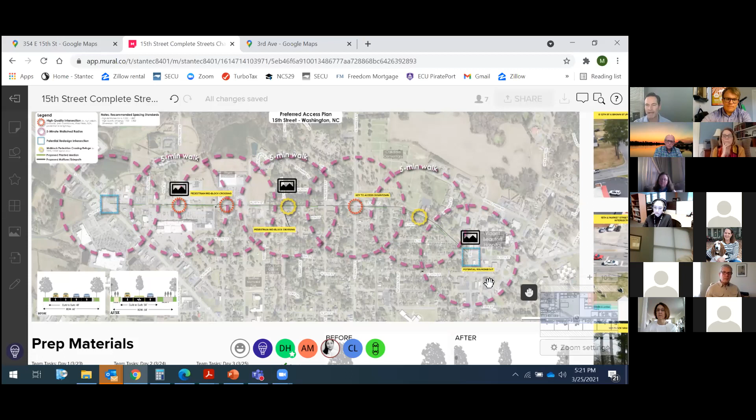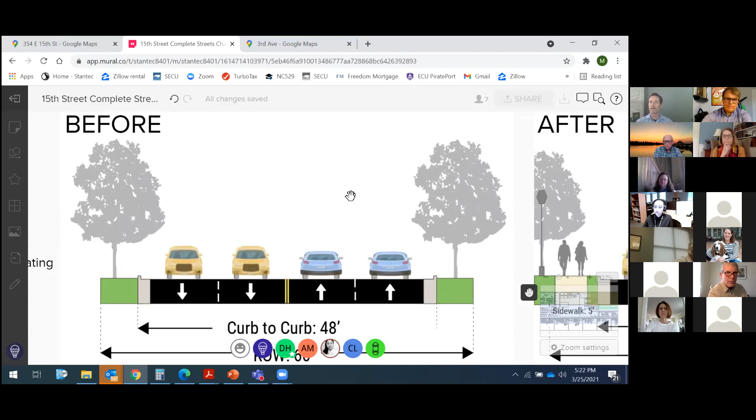So when we drill down, let's show you the before and after of the corridor. A lot of these elements have been voted on by you, or at least you've provided some good direction. I'm going to stop and we're going to look at the chat box. Dan, I'll call you out to talk about what we're hearing from folks. Feel free to put comments in the chat box or raise your hand, and we'll talk about what we're seeing here.

So this is what it looks like today. We've got 4 lanes, and curb to curb we have 48 feet basically, and then beyond that a little bit of room for right-of-way. Remember that the right-of-way hasn't changed on this corridor for over 100 years. It used to be a dirt road that they paved and then later added just another lane.

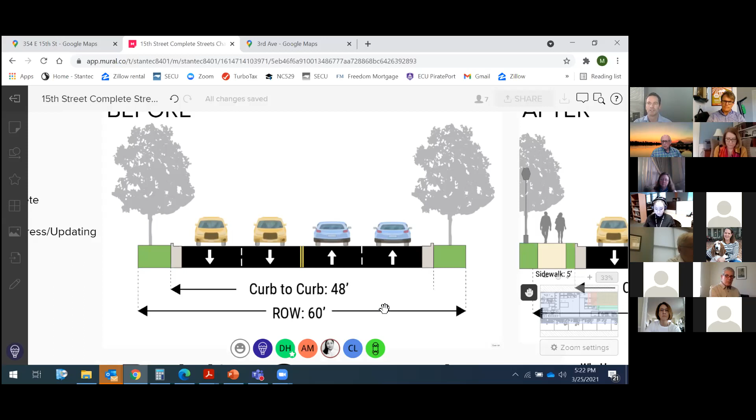So they didn't really acquire more right-of-way along this corridor. Our premise, based on what you told us, was to stay within the right-of-way as much as possible to limit takings of property, and to limit acquisition of parking spaces or buildings.

So our direction, after listening to you, remember the number one issue is multimodal - getting people on bike and on foot and those that are disabled through the corridor and across the corridor. So we're recommending bringing in that curb, repurposing some of that asphalt, reducing it to 3 lanes or 2-lane divided, and put in a 10-foot side path or a multimodal path. A lot of folks refer to it as that.

We can put our street trees and pedestrian level lighting on the outside here, as well as some small caliper trees in the median to create that sense of enclosure.

And remind ourselves, the only way to control speed, which we know is a problem, is if we redesign the road. That's the only way to control speed. We can't simply just go from 45 miles an hour and put a 35 mile an hour speed limit sign and think that people are going to listen and pay attention to that. That's a fallacy. So we've got to redesign it, create a sense of enclosure, putting in more high visibility bicycle and pedestrian treatments so people can understand if they're behind the wheel, they can expect to see a pedestrian or they can expect to see someone on the bicycle or someone in a wheelchair. So when we take that - I'm going to stop right there.

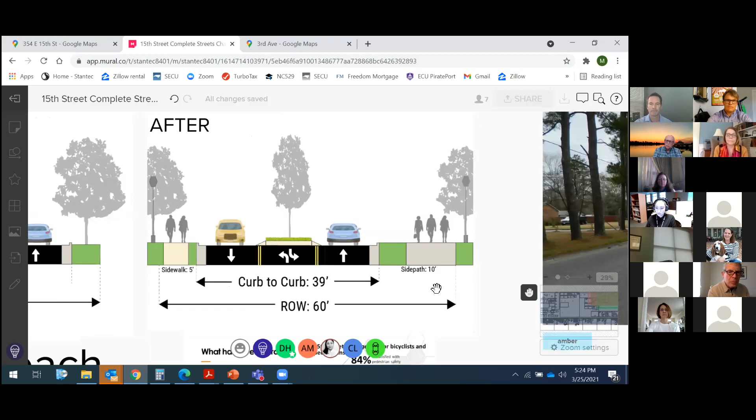So let's do that. Dan, anything from the chat box? Yeah, actually, you've got one comment, and this is from Fred Watkins.

I think it's a good opportunity to talk about how we go about analyzing a corridor and the kinds of things we look at. Fred says: I want to provide this additional info and opinion. According to the DOT and their average annual daily traffic, that's a measure of traffic volumes for 2019, our traffic count is 20,000 at Bonner and 22,000 at a point along 15th Street between Bridge and Market. With this amount of traffic in 2019, I can't imagine a 2-lane road with a center turn lane. It's more traffic than any location on US 264 from Hudnall Street all the way to the 17 bypass. 15th Street needs to be a 4-lane road with a center turn lane and pedestrian-friendly crosswalks at key intersections. More pedestrian-friendly access is important, but not as important as making this a safe road for vehicle traffic and easier access to the largest concentration of retail businesses in the Washington, Beaufort County area.

And here's the reality, and I've done this a thousand times. I understand, it is a lot of traffic, it is a tremendous amount of traffic. But here's the reality: what you have right now is a 4-lane road. And I want everybody to come to realization, because we've talked about this probably 10 times in the past 4 months, but the reality is this - your 4-lane road is not working like a 4-lane divided or a 5-lane road.

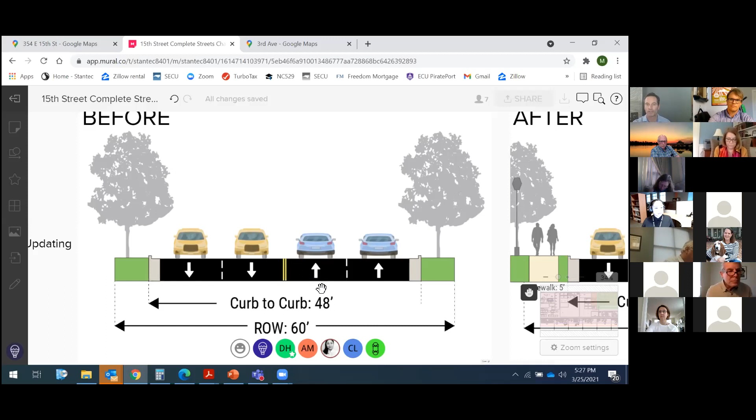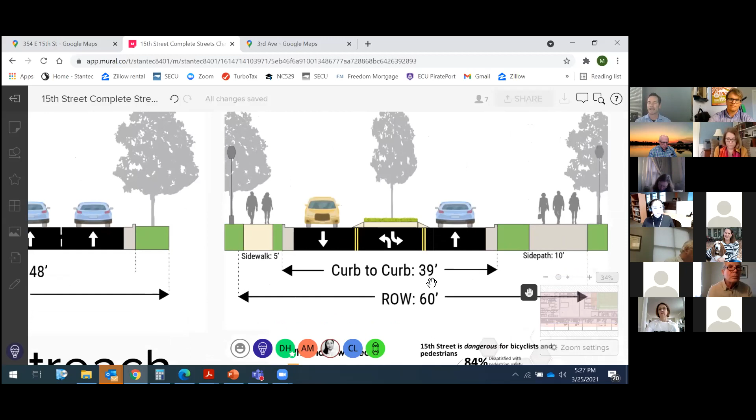So, 2-lane divided pockets of median. It won't be continuous median, but it's in areas that it makes sense to put it in there. That's a good analogy. Reality is, yes, there's a lot of traffic. It ranges from 13,000 all the way to 21,000, 22,000. But the reality is, the 4-lane is really acting like a 3-lane for most of the time that we're going through there.

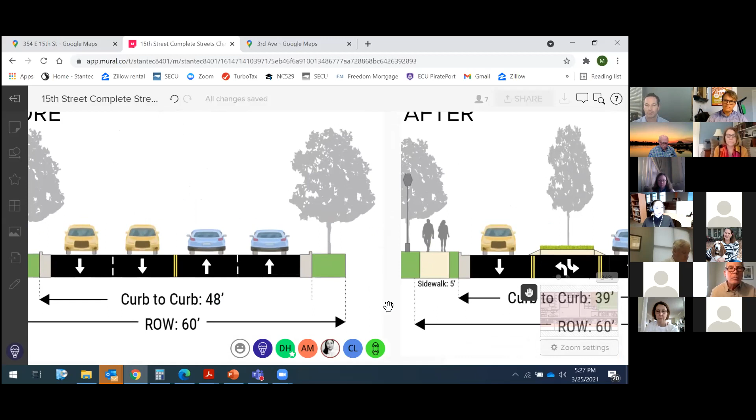We also have to look at precedent. Where has this been done before? We worked on Hillsborough Street in Raleigh, a great example. It had 24,000 vehicles on it, and they reduced it to only 2 lanes without a left turn bay, with parking and a bike lane. We're not being that aggressive here, but it's already been in place for 15 years and it works wonderfully.

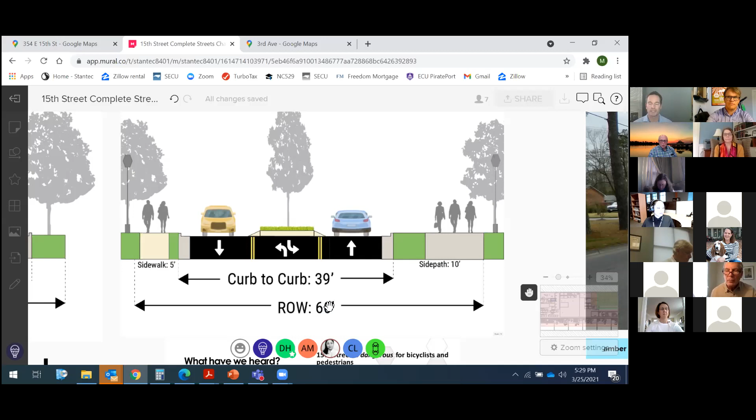Here's the other thing helping you, unlike Hillsborough Street: you have US 264, and a lot of times that's the main route. There's a lot of people cutting through 15th Street to go from A to B without stopping at all, so we want a good balance. We do have a good grid network, but US 264 gives folks an alternative route if they're going through the community. So I think we can impact and lower the overall volume on this corridor as well.

It won't be by much, I'm not going to overpromise that, but the reality is we don't need a whole lot of through traffic going through here. If we redesign it correctly, we can lower the speed. For me as a driver, I'd be more comfortable traveling—as long as I'm moving, I'm happy. The last thing I want is stop and go, stop and go, stop and go, and that's what's happening a lot along this corridor based on what we're hearing from folks.

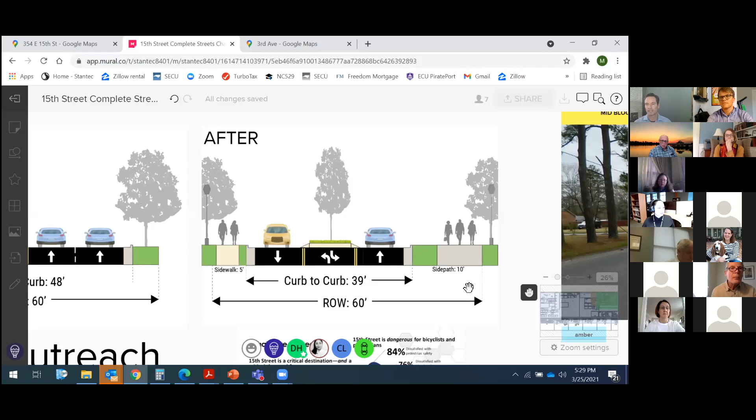That's a great insight, and I'd be remiss if I didn't address that issue. I think we addressed it Tuesday and Wednesday at the back of the symposium, but you're correct—that's the biggest trade-off we're considering along this corridor. It's a lot of traffic, but we have alternative routes, and the reality is the 4-lane is acting for a lot of time during the day as a 3-lane road.

All right, so with that, I wanted to show the actual concept design, because I think this is wonderful. We did some updates here, and I'm going to go from left to right, then drop down and show some photo sims at the street level—what does that look like? So what we're looking at here is an actual AutoCAD design, a computer design software that engineers like myself use to show the physical footprint of the recommendations.

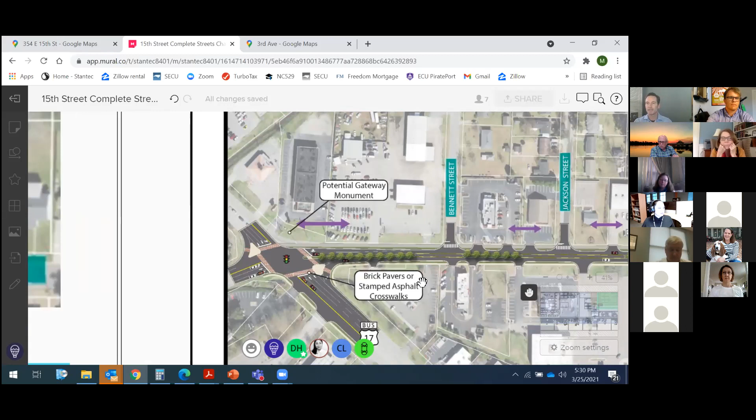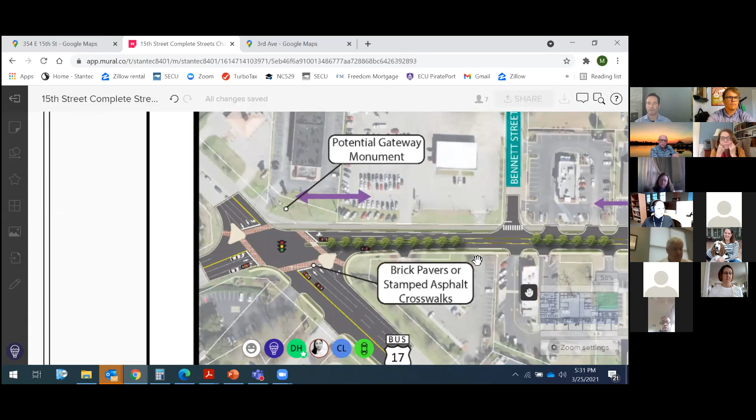I'm going to start on the west and head east all the way to Brown Street. Right now we're at Carolina Avenue and US 17 Business. As we apply that cross section, the 2-lane divided and 3-lane section, you can see we're putting in pockets of median. Honestly, the median locations will likely change during final design, but the reality is it helps control access a little bit and also protects from turning vehicles. The intersection here, we're really talking about celebrating this area as a gateway.

We're recommending brick pavers and stamped asphalt for crosswalks, high-visibility crosswalks, pedestrian countdowns, pedestrian-level lighting, and shade trees along here. We're going to do something similar to 5th Street that you guys just finished with your streetscape, and enact a volunteer tree program—we talked about that previously with Jonathan and the mayor, and it worked pretty well for you guys, so we're trying to embrace that. Considering you only have 60 feet of right-of-way, we want to limit or avoid impacting that altogether, and I think we've done a pretty good job of it.

Yesterday, someone asked how many trees would be acquired based on our recommendations. I think Mary Day, I see her here, welcome back—the answer is, I think, none, because we went back and looked at aerials. We're confirming that as we speak, but there are no trees within the right-of-way, within the existing NCDOT right-of-way. So that's a really good thing.

But the ones that are out there seem to be outside of the right-of-way, which is fantastic for everyone. So really, this is the gateway, maybe, and think about it - as people come into this corridor, especially this segment, we want to celebrate that a little bit with a potential gateway monument saying you're in a different part of town, you should expect to see bicycle and pedestrian and people walking around too.

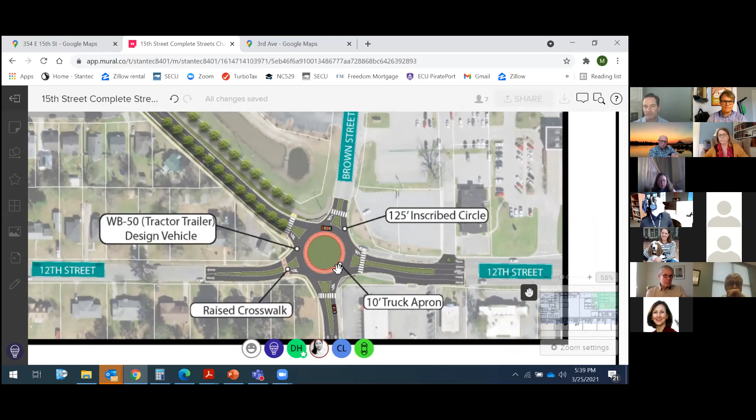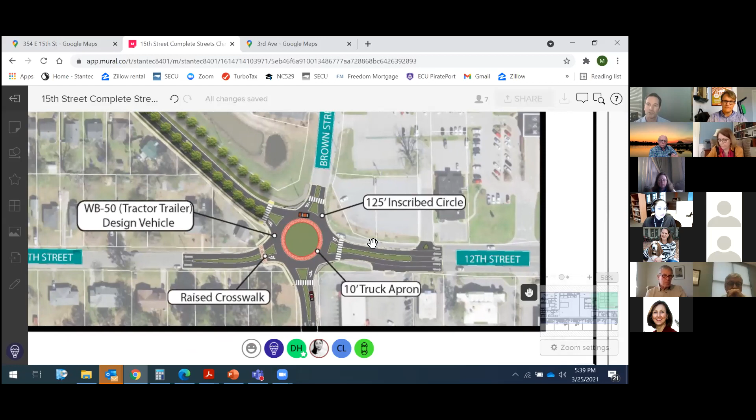12th Street—we heard people having a hard time getting onto 15th Street because this is kind of a dead man's curve here. It's very dangerous. And Chief Drakeford had mentioned that this signal was one of the highest ones where we see a lot of ticketing for people blasting through red lights on here. So I'm going to stop there and turn it over to Dan and see what we have in the chat box.

Yeah, I got a couple. I know I kind of zipped through that a little bit. Yeah, not a problem—I think it was important to see the whole corridor.

So a couple comments here. The first is from Betsy saying, does the coordinated signal timing help accommodate those traffic amounts? I think that's going back to Fred's comment, and Beth followed up saying, looking at 5th Street and the improvements they did there, can't imagine the street would be the same by shifting to 2 lanes. So maybe you can talk about how not just the design of the road, but how that signal timing might help with the traffic as well.

Wow, that's a good point. Yeah, I had to reread that to figure out what that was. So yes, I would say directly—let me answer your question. Does the coordinated signal timing help accommodate the traffic amounts, the volume of traffic? I would say yes, as a deterrent.

Because look, we all get in our cars, especially people going through your community, Washington, to get to the coast, to get to their week-long rental, right? And they're all doing the same thing—they're using GPS to get through your community. When the GPS tells folks to go through 15th Street because it's quicker, that's the logic they're following. That's why we don't have a whole lot of traffic on 264, the actual route that should be carrying more US, more intrastate, more traffic through your community. It's a US route. We should advocate more traffic going through the US route. This is a local route, it's 15th Street.

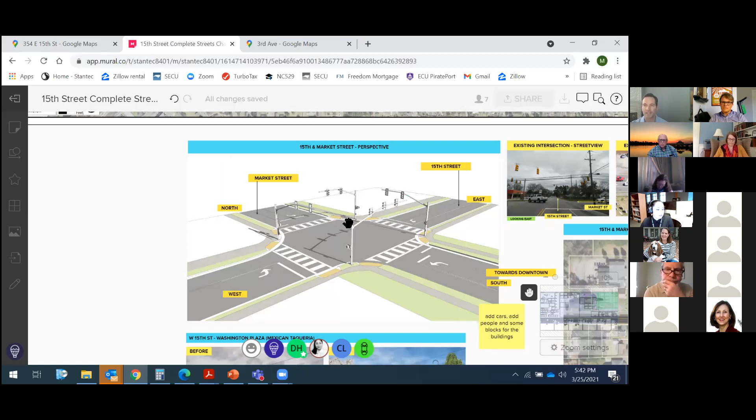Yeah, this is true. Thank you, Betsy, that was awesome, and that's the reality. I go back to a couple comments before - there is no silver bullet we can put out there that's going to address all the needs, all the problems, and the desires of the community as a whole. We know there's going to be some trade-offs, and that's the reality of retrofitting a road like this, but you guys are doing great.

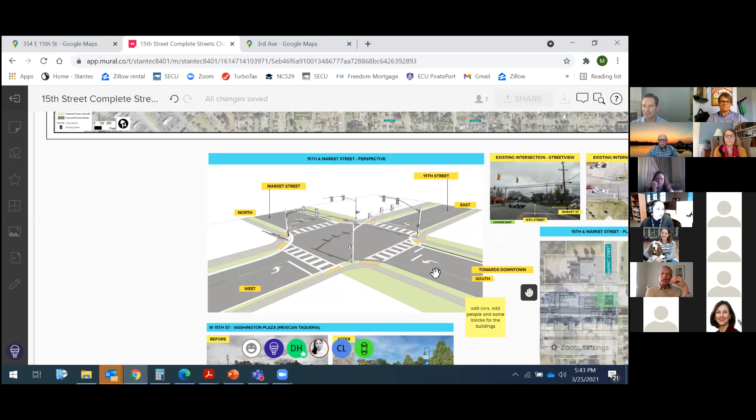I want to show a couple perspectives. Mary Day, this was your favorite intersection you asked about, so we wanted to show you what that looks like. Do we have the after effect on that? Dan, somewhere? I thought we had an update of that one, but apparently not. Of the Market Street intersection? I think you may need to refresh your browser. Whoops, it may have not fully loaded at the time.

All right, well, let's just walk through the ones that we have. And folks, some of you have seen this - this is Washington Plaza, and again, this is kind of a skewed angle looking at that.

We wanted to show this because twofold: one is, how would the retrofit happen? So what we're advocating for here is that we're trying to repurpose this area. We take that outside on the north side, the outside curb and gutter, and bring that in. And that's where we put in our planting strip and our 10-foot multi-use path, and the remaining area of the right-of-way, which is the area that's owned and operated today by the State Department of Transportation, is the area that we're making changes to. We're not taking anybody's private property on that. So your power poles, especially the ones with the transformers, are actually outside of the right-of-way, or just on the cusp of your right-of-way line there too, and we do not want to touch those as well. That'll save us a lot of heartache down the road.

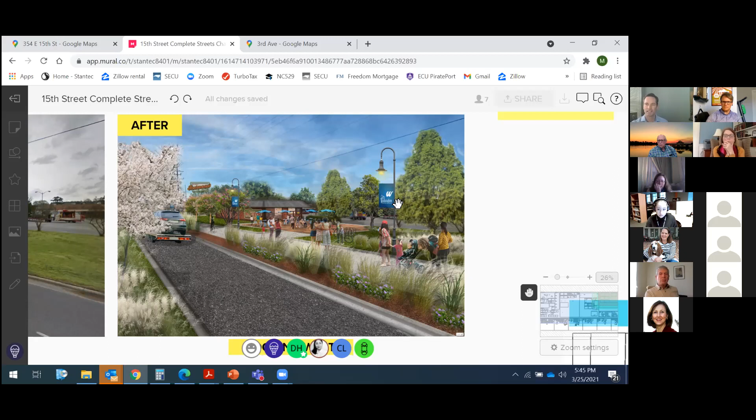So what does that look like? We took the liberty of looking at Washington Plaza only because it's seen a lot of turnover. It's got a sea of parking in there, and who knows what that's going to look like in 10 or 15 years. I think it's on the market, like we mentioned earlier, but we're hoping that redevelopment does occur. And in fact, we're not saying get rid of the Mexican restaurant here, but wouldn't it be great to enhance more business for that restaurant, to have some more outside seating, some of the things you guys yourselves had indicated in our survey work. So we actually reduced the curb down here and put in a planting strip and a multi-use path on the side, pedestrian level lighting, maybe a banner or two to celebrate the corridor. And in this segment, there's no curb cuts, no driveway, so this is an area where we could slip in a planted median. Will it be planted to this glorious level? Probably not, but you get a picture of what that could become.

Van Norden, I think this is where Vanessa lives here. And I think there's a problem, because as a walker, someone on a bike, or someone that's handicapped, how do you get across this road?

I'm going to zoom in, it's over 1,500 feet to the nearest crosswalk. No one's going to do that. And what's happening, as verified by some of the folks that live off of Van Norden, is people are running across and taking their life in their own hands. That's not a good thing either.

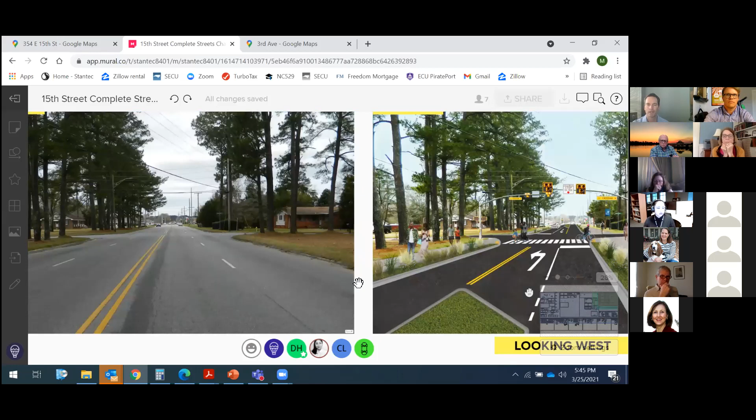So what would that look like with a mid-block crossing? Reduce the lanes down to 3 here and provide dedicated left turn bays, and then put in a HAWK signal. What that does is stop vehicles, especially if there's a pedestrian or bicycle that pushes the button, and allows cars to stop at the proper location.

And there's your multi-use path. Again, this is the north side, so we're actually looking towards the west. We're looking towards Carolina Avenue.

Dan, anything on the chat box? Yeah, I want to circle back a little bit, because I think there's still some lingering questions about the Fifth Street improvements and what that congestion might look like on 15th by potentially bringing the lanes in a little bit. So maybe you could talk about the role that 15th Street plays here, and why the complete street design might be intentionally shifting some of that traffic over onto Fifth Street.

Oh, okay, gotcha. And that was a question, right? It is, yes. So Dennis, you said look at the backup on 5th Street and the Route 17 intersection where they went down to 2 lanes. I can't believe it won't be the same. And I think there's a broader question of 4 lanes versus 2 lanes and what the role of 15th Street is.

Yeah, well, and that's it. Whoever brought that up, that was a great question, because if you think about it, over 120 years ago when 15th Street was created, its function and design back then isn't serving the same purpose that it is today. But if you think about it, we've done nothing to improve 15th Street. So that's a great comment.

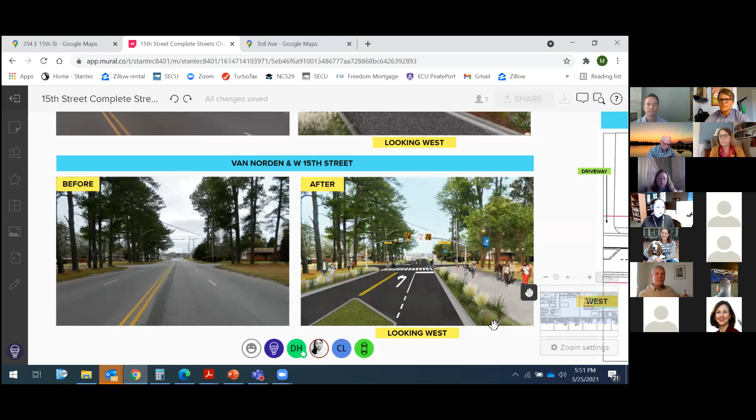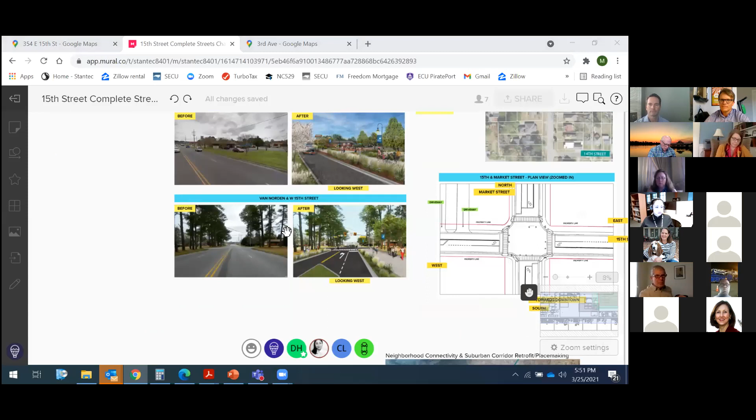I'm a city councilor serving my first term, and I ran in part because I heard so much frustration with the lack of action accommodating people on foot, people who use bikes to run basic errands and to go to their place of work. I see them all day, everywhere, whether I'm in my car or walking. I see our people who use bikes as basic transportation. As you said, Mike, there is nothing for them, but there is a tremendous desire on the part of the public.

That's in part why I'm on city council, because so many people responded to that, and I was responding to what I heard from others in Washington. More than that, it's a fundamental question of civil rights. We have people in mobility chairs, scooters, we have wheelchair-bound residents. There's a nonprofit, the Blind Center, located in Washington, which has many clients. So we have visually impaired people too. And again, there is nothing for them.

Almost every day, I see not one or two, but multiple people navigating car-packed streets in wheelchairs, and that is just wrong. I vowed that I would serve my council term in part to begin to address the needs of those people. And guess what? When we address the needs of people in wheelchairs, 8-year-olds, and people in their 70s and 80s, we also address the needs of everyone else. So we're covering 100% of our human community here, and that's what it's all about.

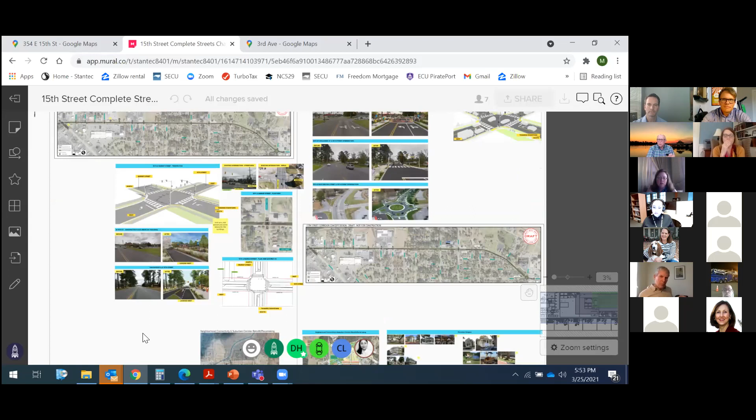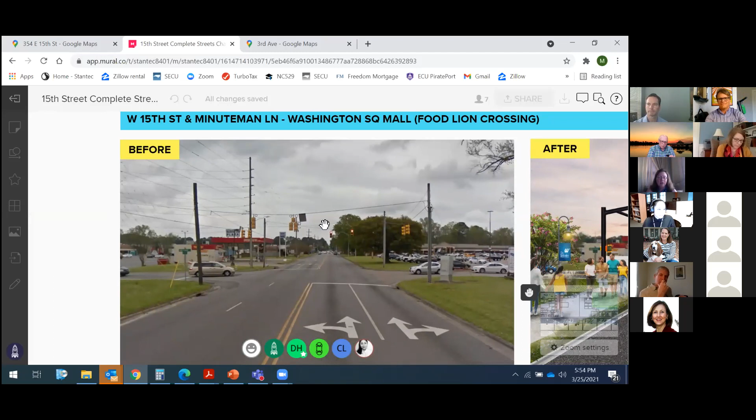I definitely want this corridor to be amenable for car safety too, because there's plenty of wrecks for cars, and we cannot stick with what we've got. We can do a lot better. So I think that's what this is all about. We have to compare it not to a perfect world, but to the real world, and we can make it tremendously better with what you've proposed. So much better. The status quo is not acceptable.

Thanks, and this is no kidding matter. Change is tough too. We all realize it's not for everyone, and it's tough to accept, but we're learning from our experiences elsewhere, and from our constituency here in the city. We want different. We want to feel safe going to the store. We don't want to have to get into our cars to do every trip.

So let's move ahead. I saw some conversation up there. I think someone mentioned a goat path along the corridor there. There's a dirt pathway being worn into the grass along the south side of 15th Street. Lots of people walk down that road.

Yeah, and unfortunately—okay, go ahead. No, there's one other comment that I think we'll address, but go ahead.

All right, well, in the interest of time, let's check out some other photo sims. So this is actually looking east, this is Minuteman Lane looking east. I guess that's where the two shopping centers are, right across from each other—Washington Plaza on the north side and Washington Square on the south side. So lots of cluster here. We're probably not going to touch any of the high tension transmission lines that you see here.